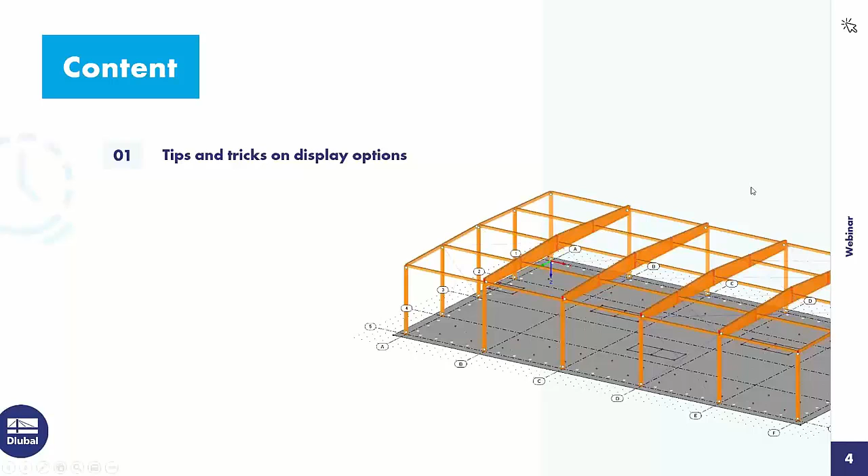To the agenda today, I will introduce some tips and tricks on display options, also on the printout report, also basic information. I do a single and mass print of graphics to the printout report. And I show how to create a verifiable printout report. We turn directly to the program.

RFEM, that's a storage building made of timber and a reinforced concrete floor slab. Bracings from steel, you can see around 20. The model is completed, it's designed, the timber structure is designed, and also the concrete structure. We can go through the load cases, self-weight with roof loads and single loads from racks, snow load, the imposed loads with loads from forklifts and from the racks.

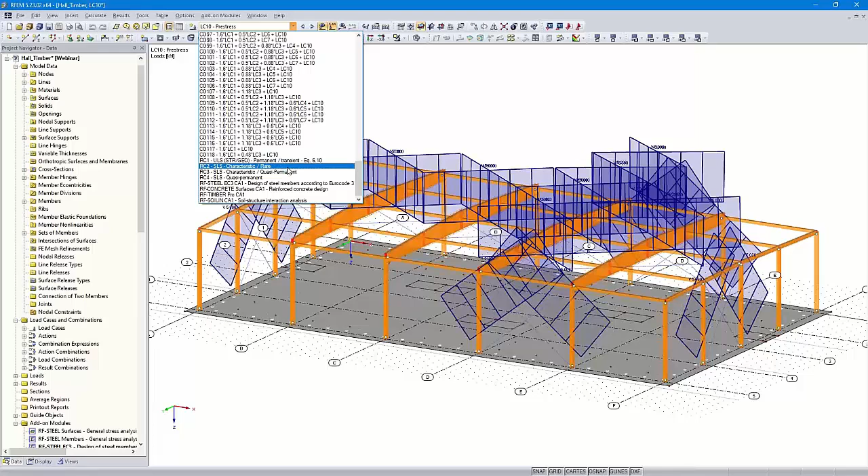Wind in X direction, Y direction. Imperfections in X direction and Y direction. Pre-stress. And then there are a lot of load combinations that are automatically created by the program. Also four result combinations, 1 for the ultimate limit state design, 3 for the serviceability limit state design.

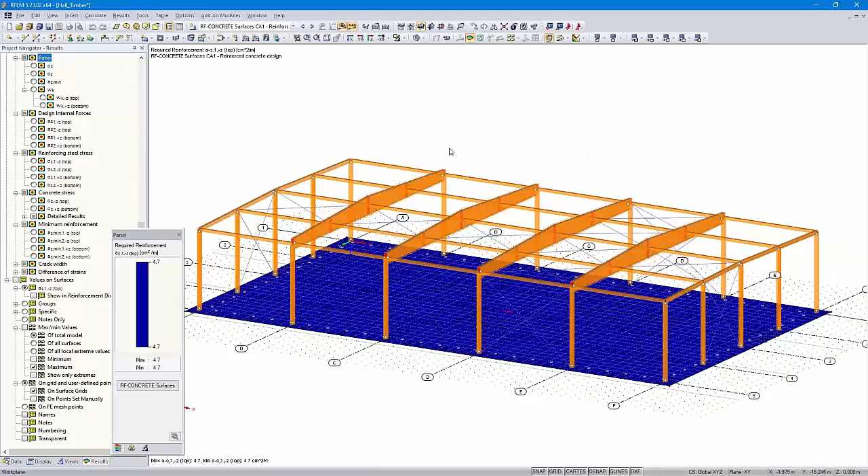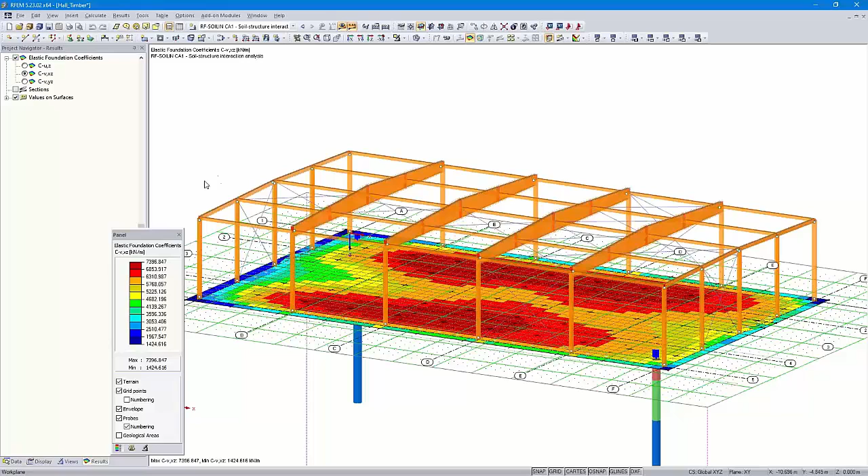Then the design of the steel structure. Those are only the bracings. You can see a design ratio of 55%. Then the concrete results, also for the floor slab. Then the results of the timber design. Here you can see a design ratio of 94%. That's in the horizontal beam here, the maximum design ratio. Then I used RF-SOILIN to determine the elastic foundation coefficients.

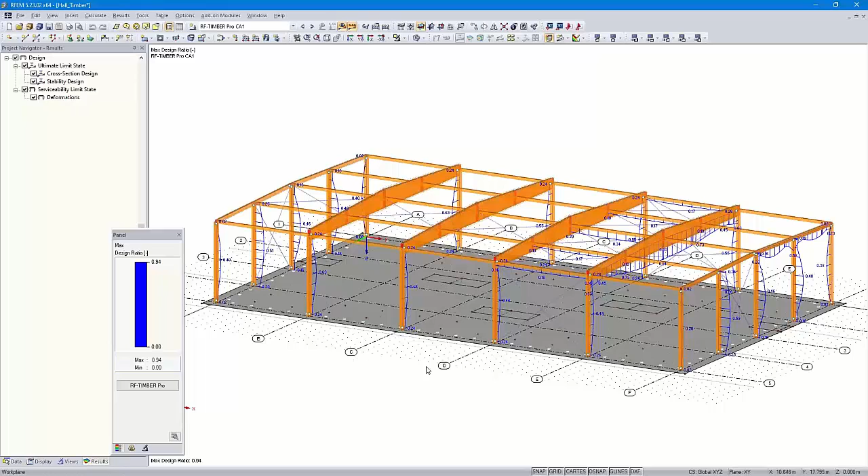But we want to start with the member results. We want to print them in the printout report. But at first, I would like to move the axis designations closer to the model. How to do that, I can show you maybe in the top view. We go here with a right click in the grid options, edit. And then here is checked dynamically according to size of model. We uncheck it and then I subtract here 5.

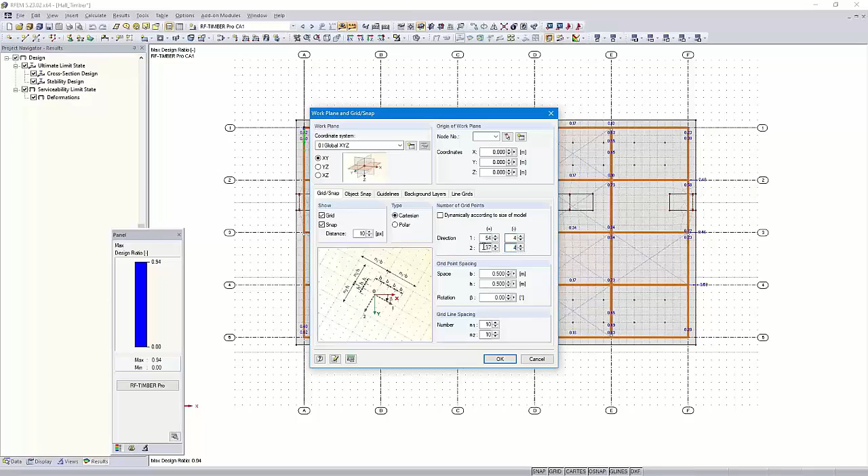Okay, and then you can see the axis designations are closer to the model. You can also hide the axis in the display navigator under guide objects, and then you can uncheck the line grids and the axis would be hidden, but we would like to show them and document them. Okay, then I make only the timber structure and the steel structure visible with that option, visibility by selected objects, and the concrete floor slab is hidden.

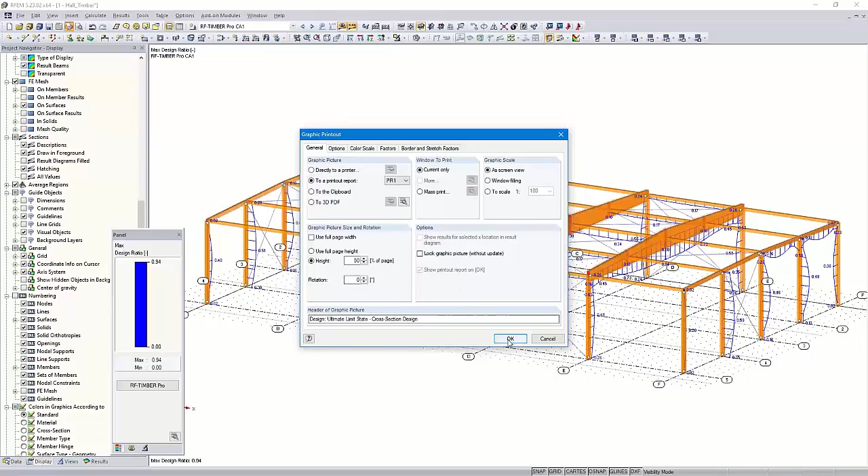Let's print that graphic in the printout report. Here above, print graphic to the printout report, the current only as screen view, that's the options I will use. Then the height, 50% of the page, no rotation, and I confirm that. So usually we would print the graphic with this option here for the printout report, input data and reduced results. But you can also use other options.

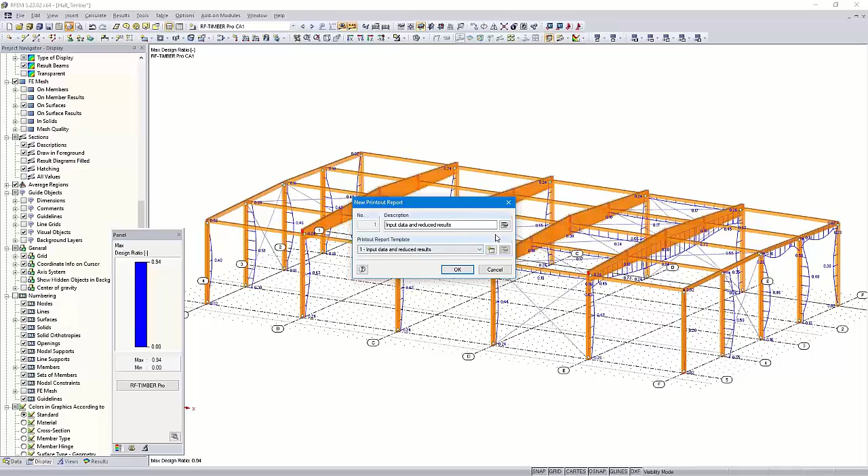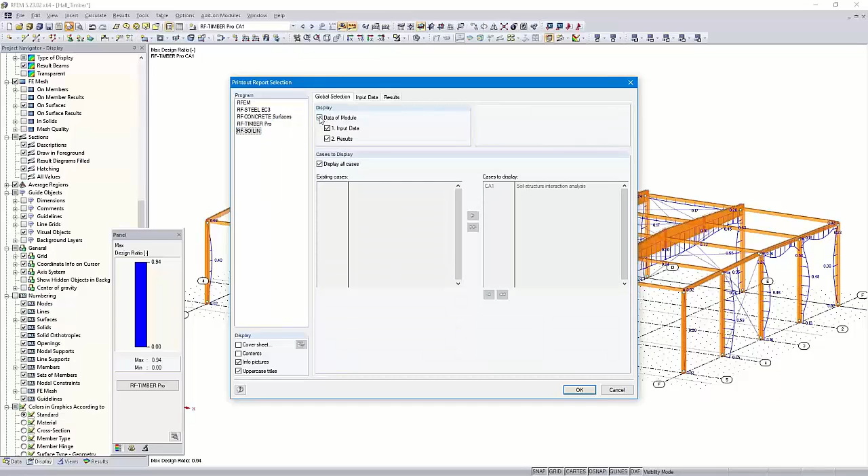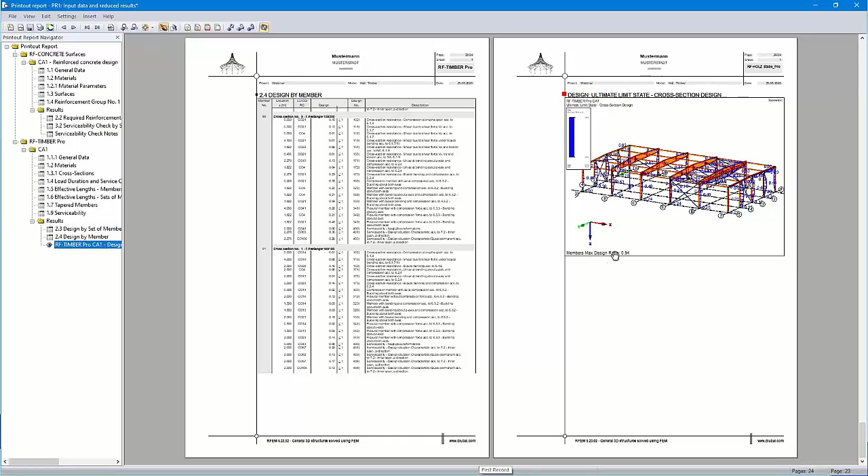But in that case, I would like to disable a lot of pages because we want to print the graphics firstly in an almost empty protocol or in a protocol with not so many pages, and therefore I disable here the RFEM data, the RF-STEEL data. I leave the concrete and timber data because we would like to print graphics in those chapters. So now a printout report with only few pages is created. At the end, we will have more than 170 pages. Now there are only 24, and the handling of the graphics is much better.

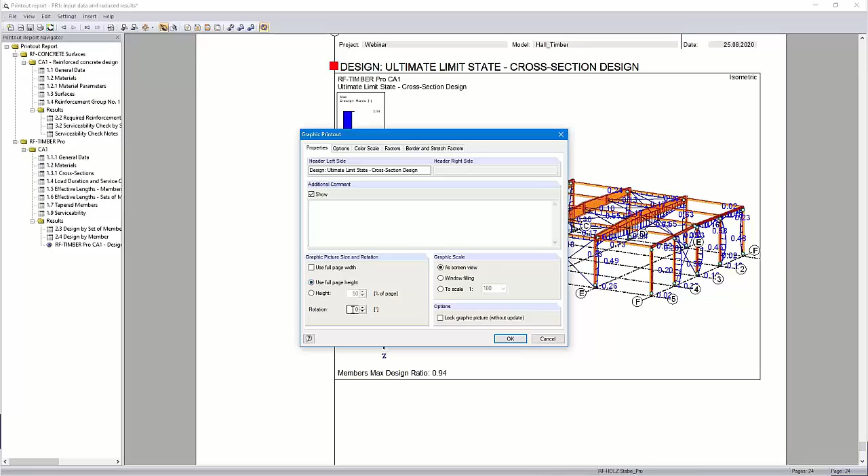Okay, but we can see that graphic is quite confusing, but we can modify that afterwards. By right click, I can open the properties and I can rotate the graphic. At first I use the full page height and rotate the graphic 90 degrees. Okay, quite better, but I'm not satisfied with this graphic. I will change it here with right click and edit.

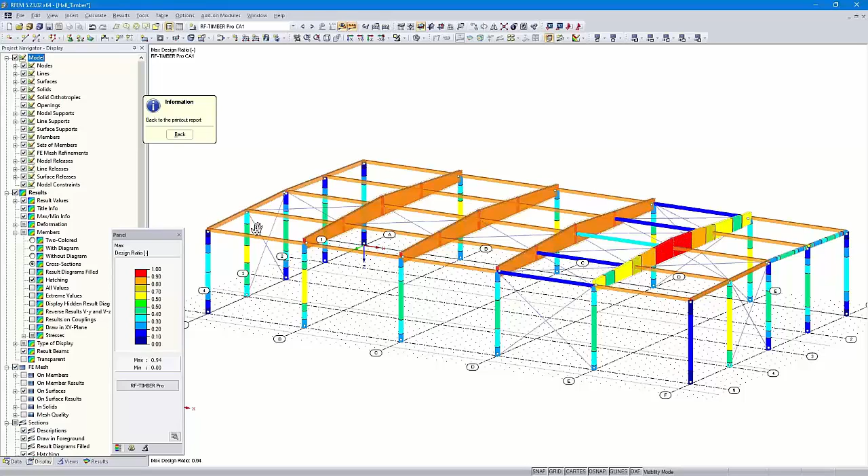I go back to RFEM, and then I can set in the display navigator under results, members, the option two-colored, that's the current state. Then with diagram, it's colored here. Then without diagram, and cross sections. I think that's a good overview. You can see the maximum design ratio is in the horizontal beam here, and I can go back in the printout report.

Okay, that graphic is much better. We will use it, and we would like to print that graphic of the axis E separately in the printout report. We leave the printout report with saving that graphic.

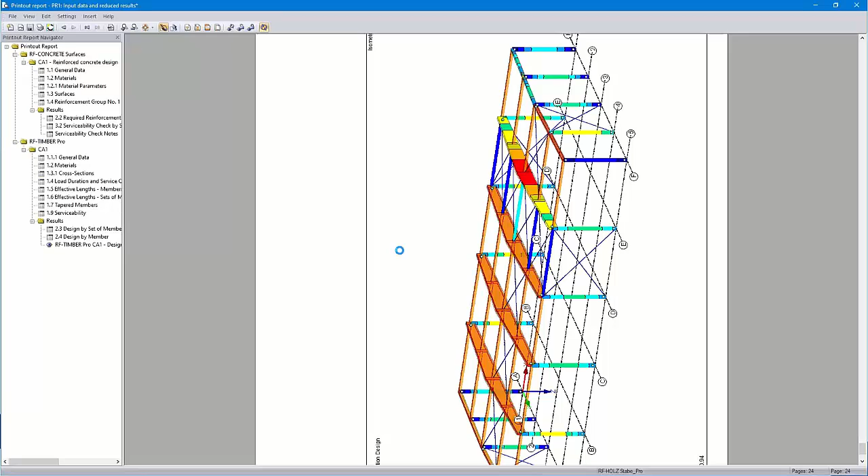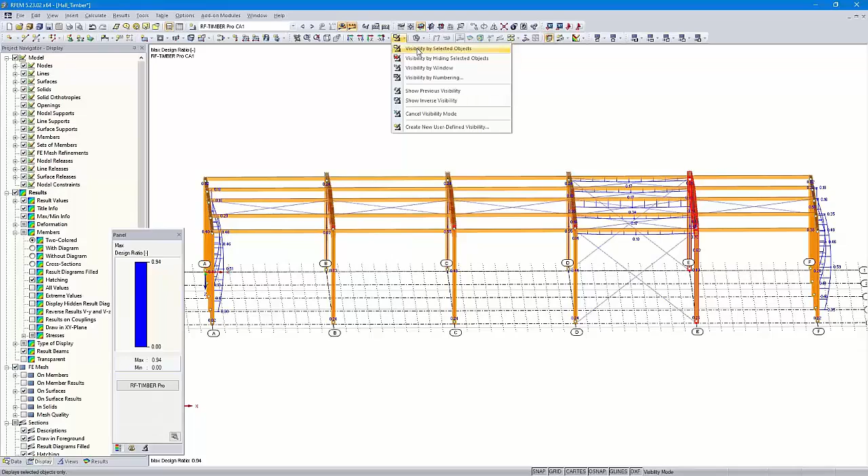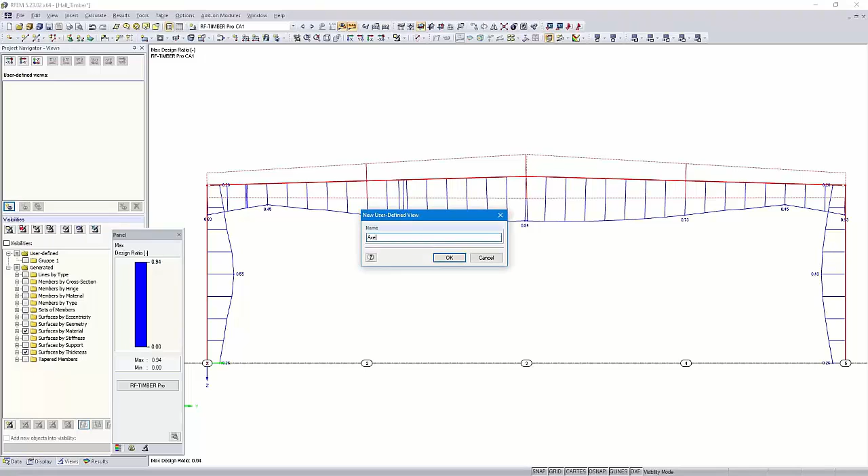Then I create a new visibility. I use this time this option here. It's the same as when I click on the right mouse key, visibility by selected objects. I use the wireframe display model, and we can create a view, for example here, create new user-defined view. I can call it axis E.

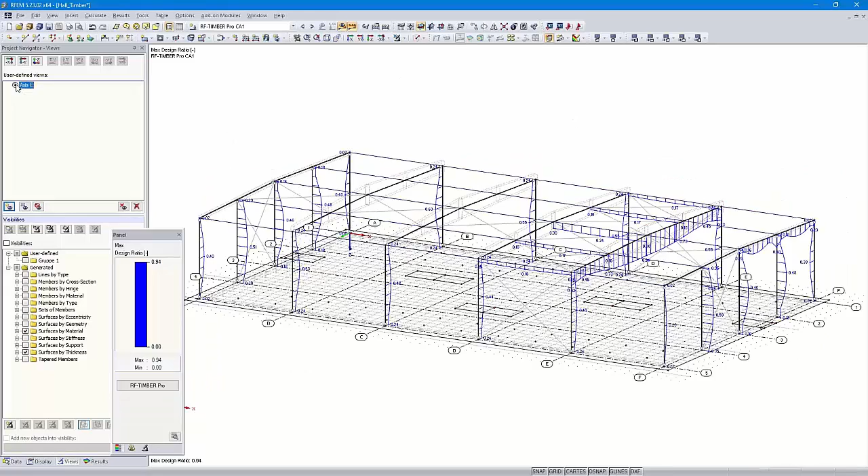Okay, and you can go back easily later to this graphic. I can show you. I cancel the visibility mode, for example this view, and I click here to axis E and come back to this graphic. Okay, here you can see the 94% design ratio. We print that graphic. That's quite easy now.

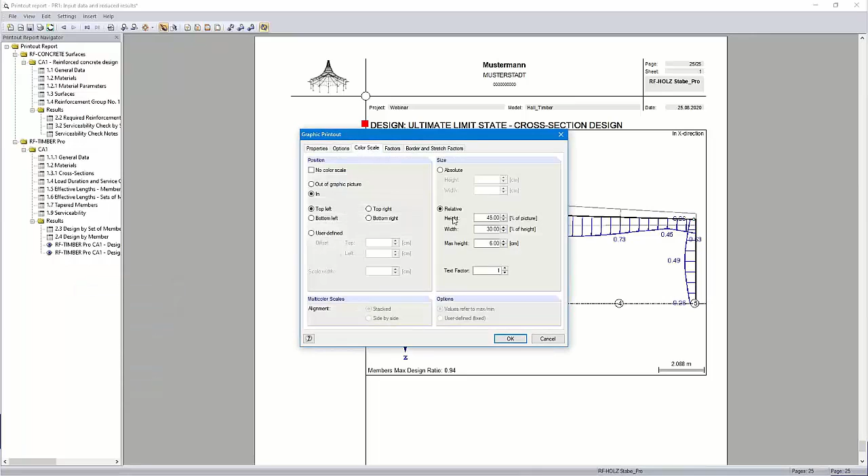So now also that graphic is created. It's quite sufficient. I could make the panel smaller here with properties. I can use a color scale and width of 20%. Okay. Okay, that looks better. I could move that to the right side a little bit, but I don't do that. We leave the protocol with saving the graphics.

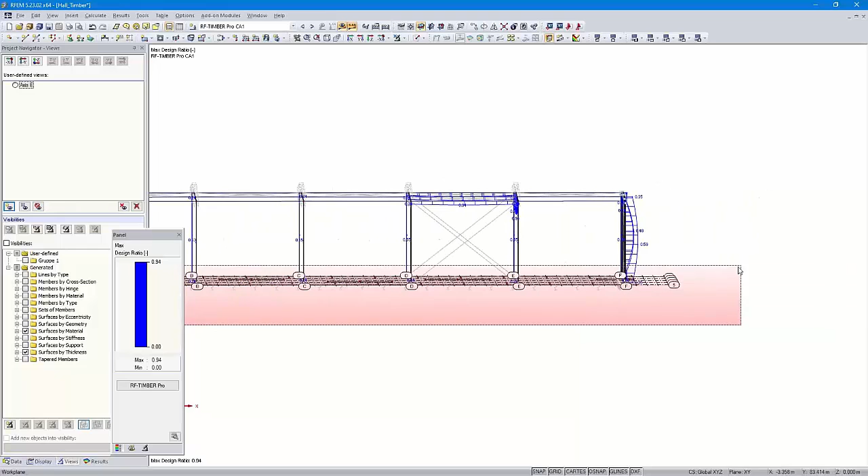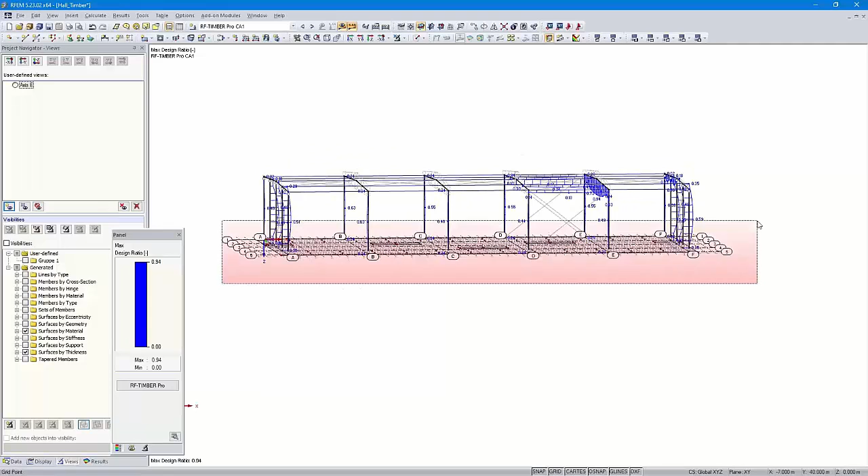And then we print the reinforcement results. Okay. I choose only the concrete floor slab in the view. Just a moment. Okay. So, a view in Z direction.

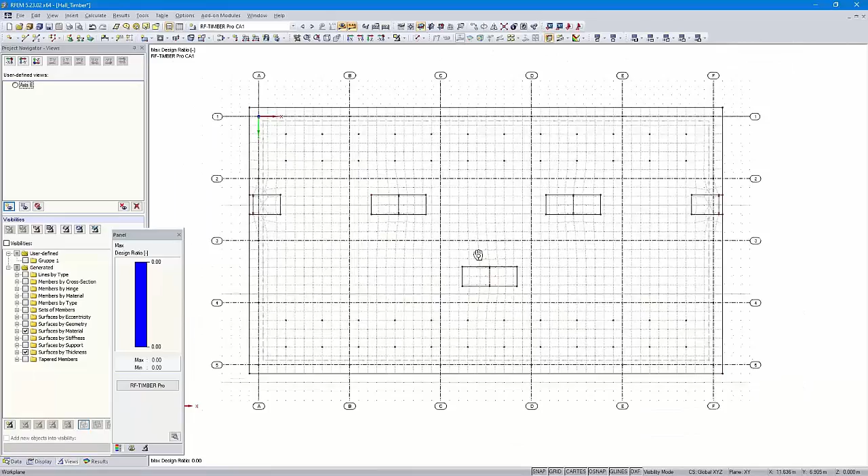A small tip: when you zoom in and out in a graphic with the mouse wheel, you can see steps. If you want to zoom in and out without steps, you can press the Shift key and the middle mouse key, and then move the mouse back and forward, and you can zoom in and zoom out continuously. Okay, just a small tip.

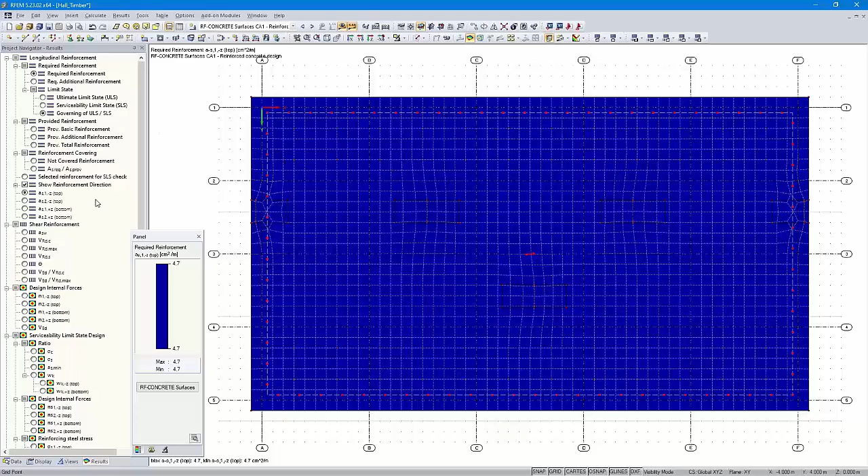Then we go to concrete surfaces and the results. Those are the required results governing of ultimate limit state and serviceability limit state. You can see there are almost the same values in the concrete floor slab because of the restrained design.

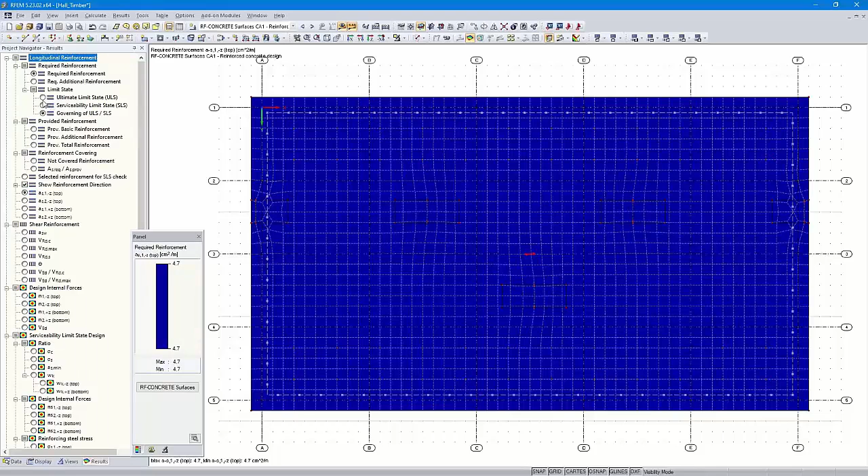But I would like to do a task that is more difficult. I would like to print a graphic with all values in all grid points. I check here values on surfaces, on grid and user-defined points. And when I have got here all values, I can use here not the ISO bands, but the ISO lines.

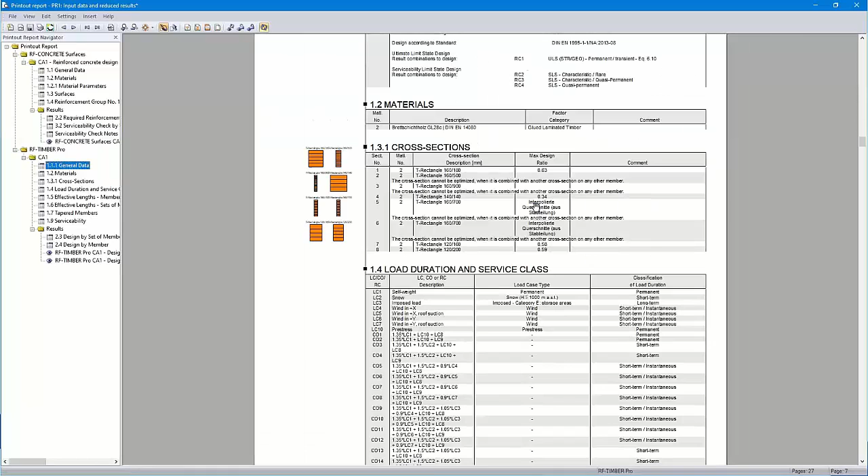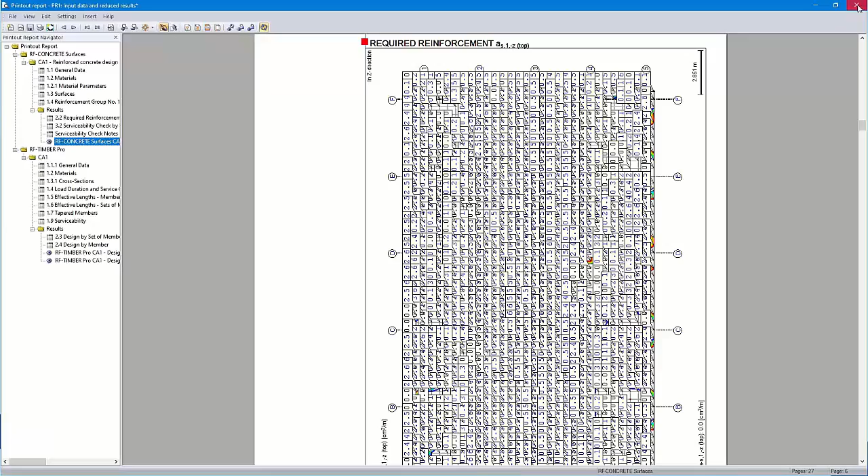And then I test the print. I print the graphic. I use the full page height and rotate it 90 degrees, and we will see how it looks. Now we can see the values are too large. The graphic is quite confusing, and we leave the protocol without saving.

By right-click at one value, we can open the display properties, and we are at the right place here, result values on surfaces. We can change the settings here separately for the screen and the printout report, but we can also use identical settings for both. We change only the setting for the printout report.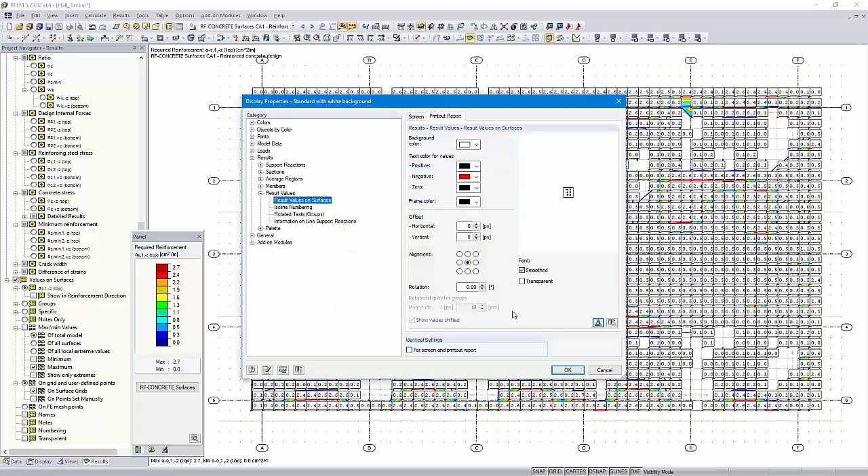I use here for the values the black color. Then I delete the arrow here. Then I move the values to the middle of the grid point, and I change the font size to 4. That's in German because my Windows is in German, but it doesn't matter. So, okay.

And then we print it again. Same settings. Just a moment, and then we will see that it looks much better now.

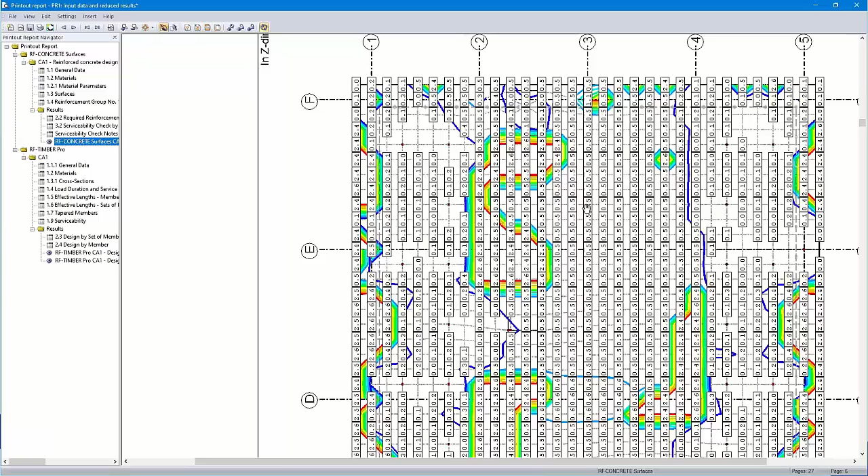Yeah, now we can read all the values here. At least for a PDF print, it would be absolutely okay. Then we leave the printout report because I would like to show you a mass print only for 4 pages for the 2 directions here, and for the top and the bottom, meaning the reinforcement.

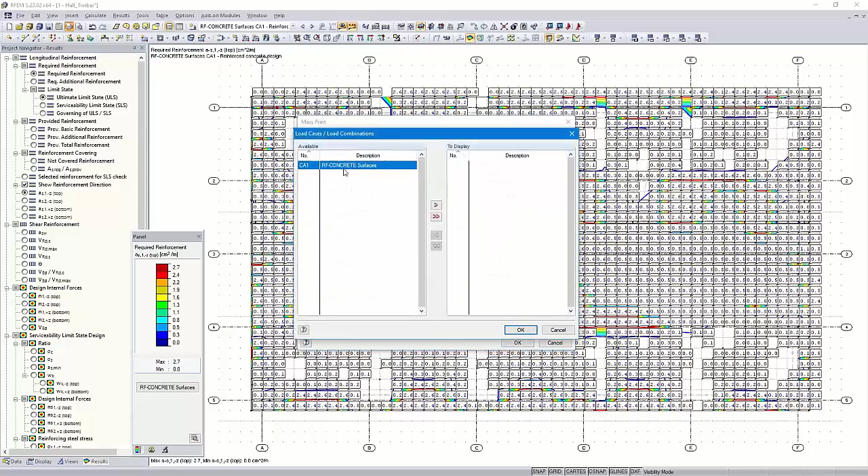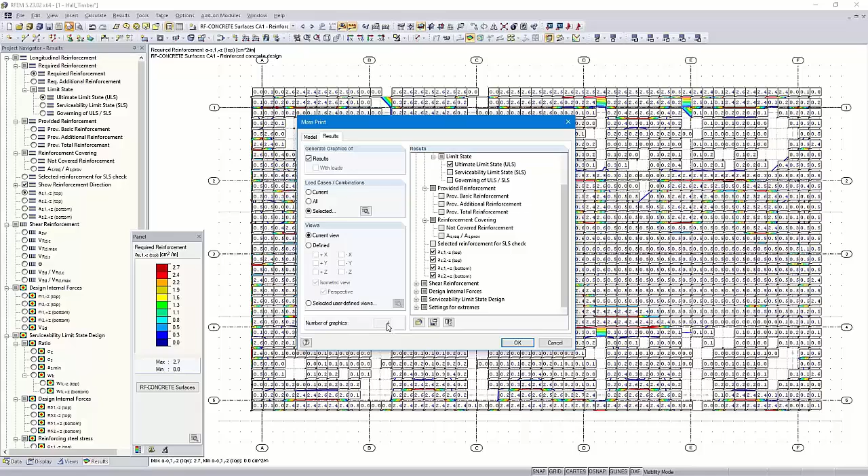I go here to print again and choose mass print. I change the mass print settings and I select the concrete surfaces, module data, choose ultimate limit state design and AS1, AS2 for the top and both for the bottom. I could also add other graphics, but for this example, 4 pages or 4 graphics are sufficient. You can do that the same way if you want to print more graphics.

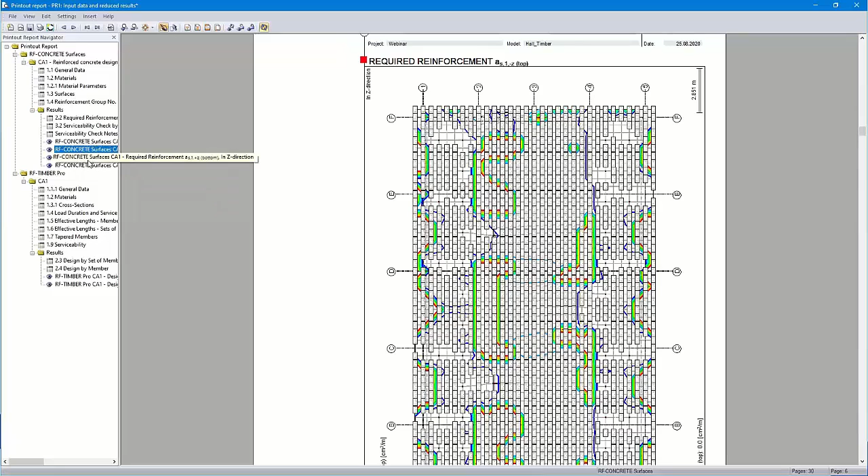The mass print works for member graphics or graphics with member results as well, but I would like to show you the function for the surface results. Okay, just a moment, and then all graphics are visible. I click our graphics here. You can see it's okay.

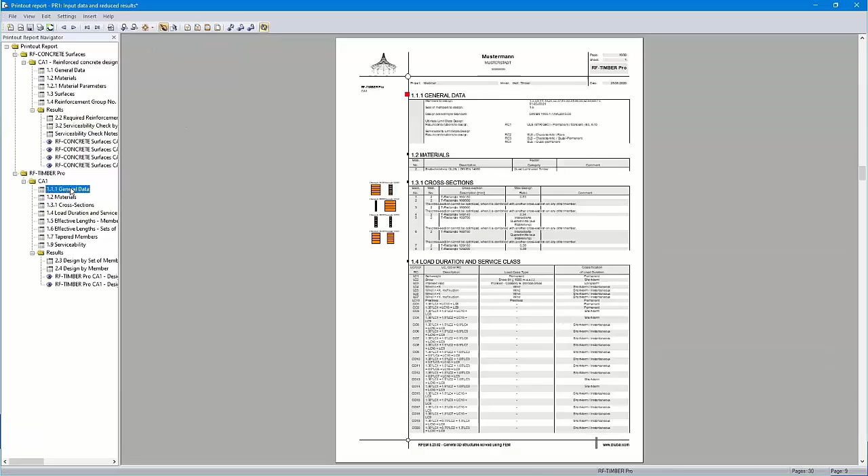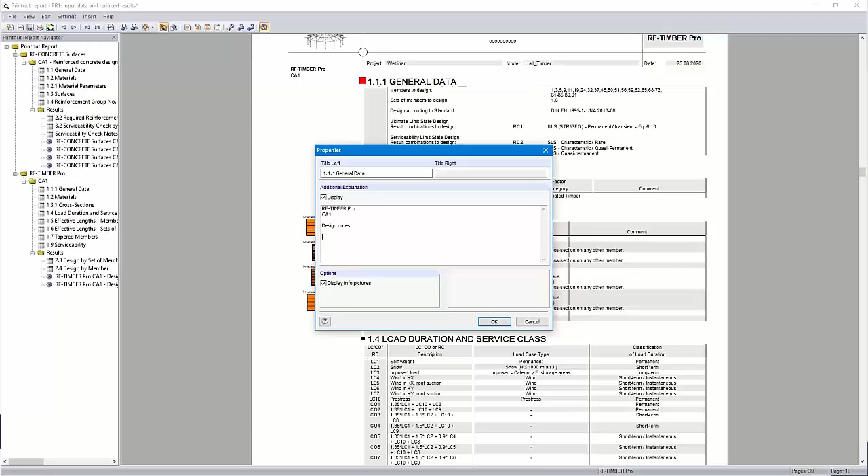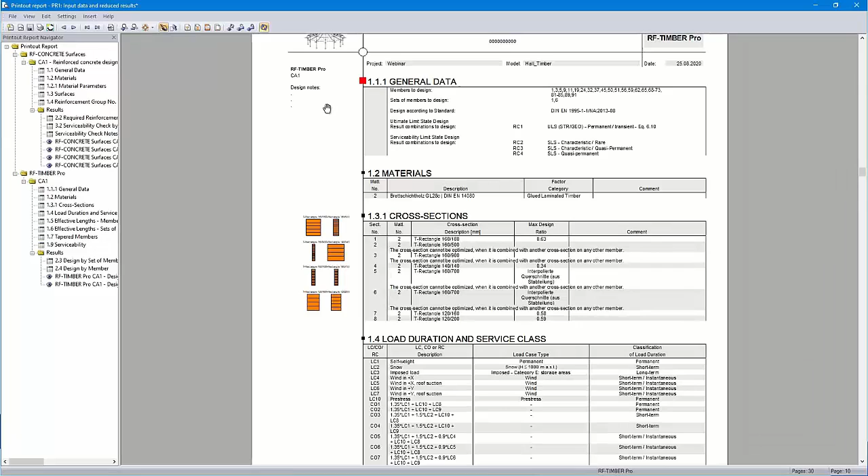Okay, a small tip. For example, if you want to add comments, etc. Here in the left column, you can right-click, then properties, and you can add text here. For example, design notes. Just an example. Here you can see it. Just a small tip.

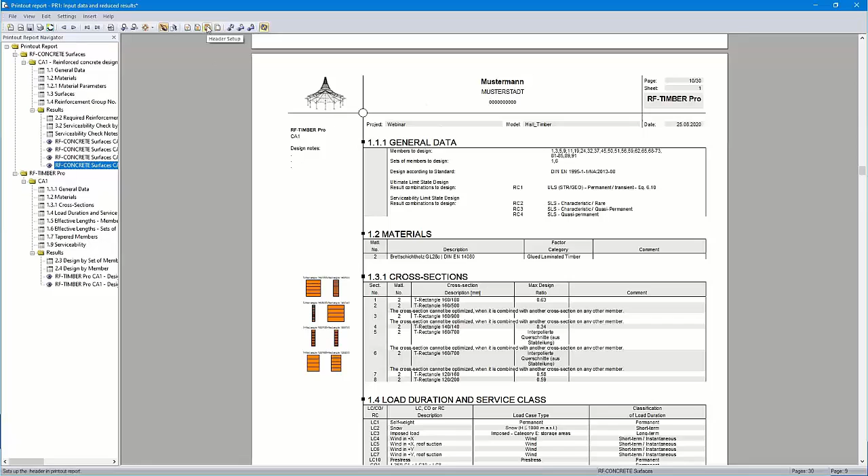Okay, then some basics. For example, we can create a header by clicking here, header setup. We can open the library and we can create a new header. I already created a Dlubal header with the name of our company, the address and the logo. You can change the first number of the protocol, for example. In the settings, you can add prefixes, etc. So the header should be okay now.

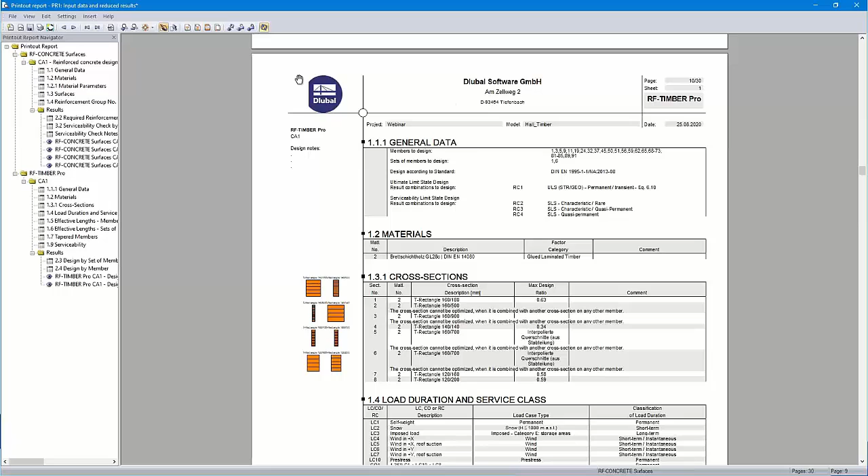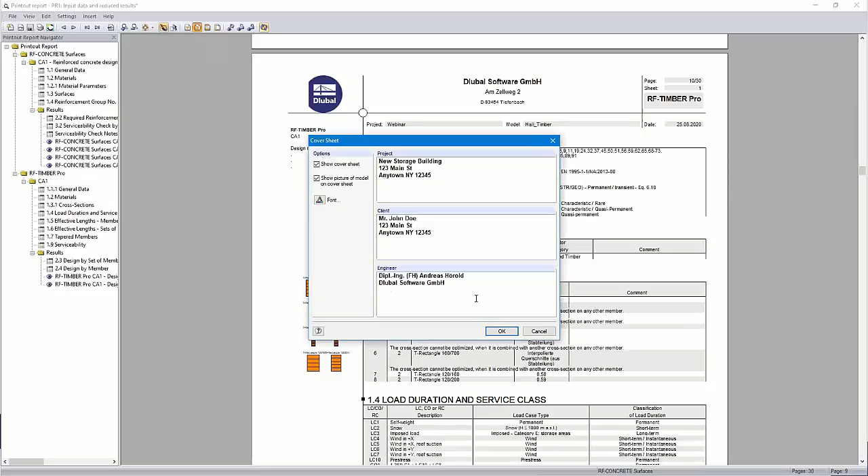Yes, okay. Then we create a cover sheet, here with cover setup. You can also show the picture of the model automatically. I can add some text here. I prepared the text. It's only fictive text, but we would like to do the printout report complete. Okay. That's the cover. You can see that doesn't take much time. We can go to the next point.

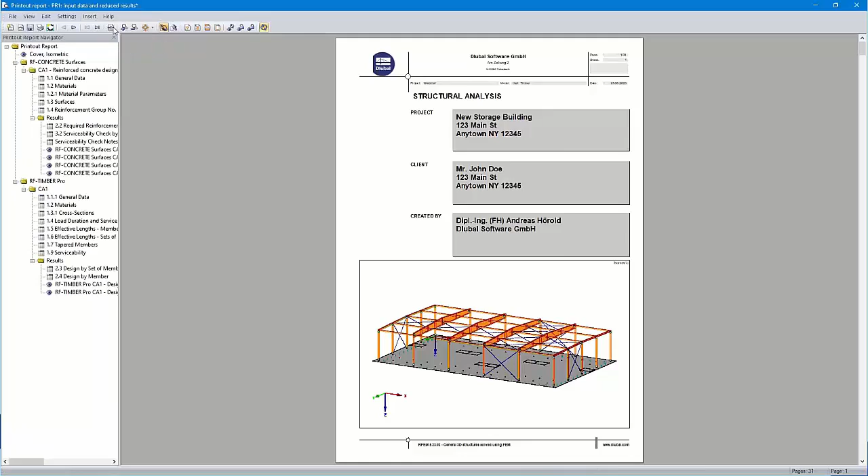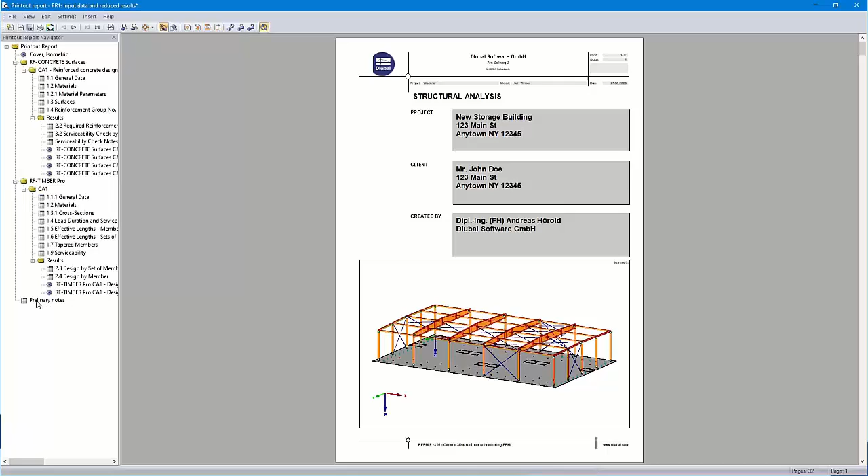You can insert text blocks, text files, images. Now I will add a text block. Here, the preliminary notes. I have also prepared some dummy text. Only the first sentence is correct, the rest is dummy text. It will be added at the end of the protocol, but we can move it later to the right place.

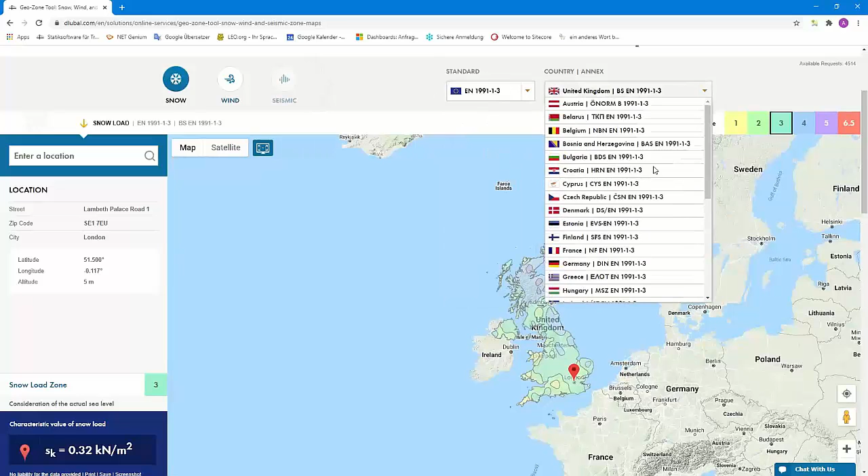I will add an image from the clipboard. I go to our website, and here under solutions, you can find the online services, for example, the Geo-Zone Tool, cross-section properties, the glossary. I think some of you know that tool already. It's free. We have a lot of standards here, international standards, also the Eurocode with the national annexes. I use Germany. I entered the address of our office in Leipzig.

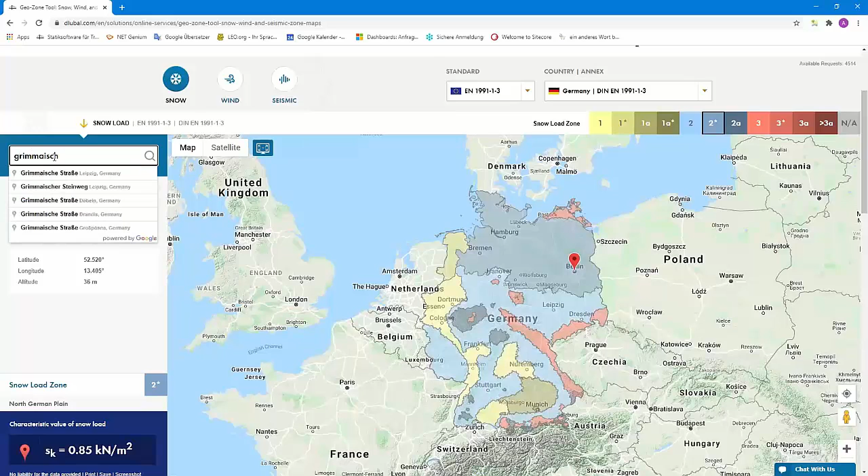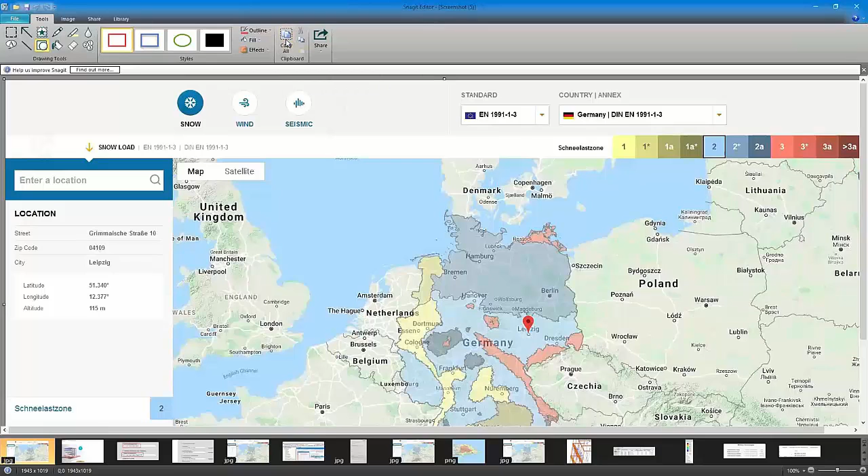Okay. And we can see here snow load zone 2 and the characteristic value of the snow load. And we can create a screenshot. Then we can open it with an image tool. For me, that is Snagit. I can copy it to the clipboard and then insert it into the protocol. I call it snow load zone. And you could do the same with the wind loads, earthquake load zones, and so on. Also other graphics.

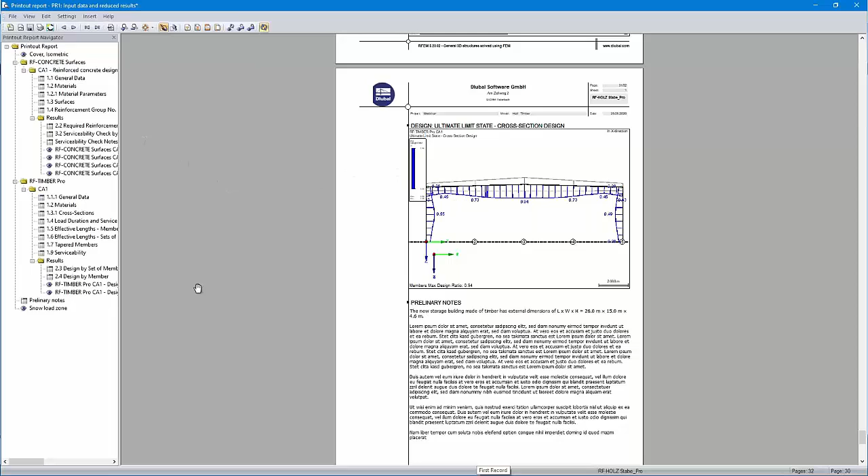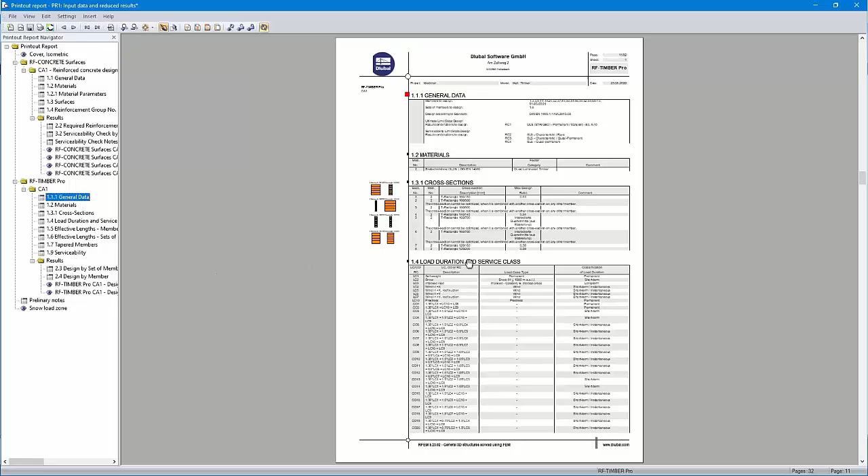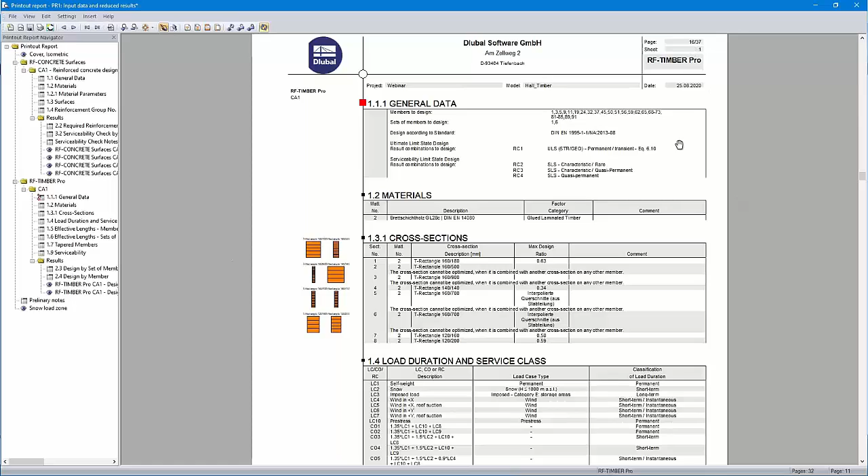Okay, in the next step, or another tip now again. You can add empty pages here. For example, you would like to add pages from external programs in your protocol. And then you see here, that is page number 11. By right-clicking I can insert pages before the block. I call it test and 5 pages. Okay. And then you can see it's page 16 and this page is page 10.

Oh. But I will delete them. Okay. Just for info. Now it's page 11 again.

And the next step is to select the topics. First I check contents here. We would like to show the content. Then the RFEM data. I then choose the steel data. Those are already in the protocol. Okay. Now you can use the settings which you like. Yeah, you can disable some content.

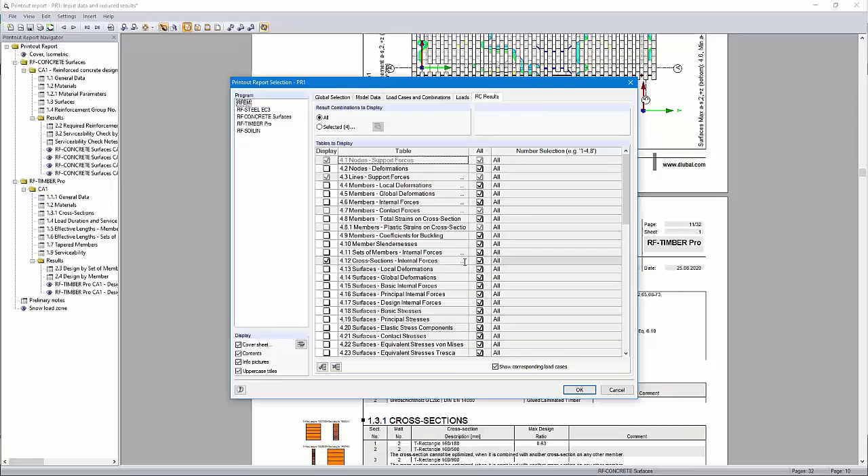For example, I will disable the results of the load cases and load combinations, and use other settings for the cross-section internal forces. I choose not the partition values, but the extreme values of the cross-sections. Okay. Therefore, the protocol will not have too many pages. Okay, then the whole protocol is created in a few seconds.

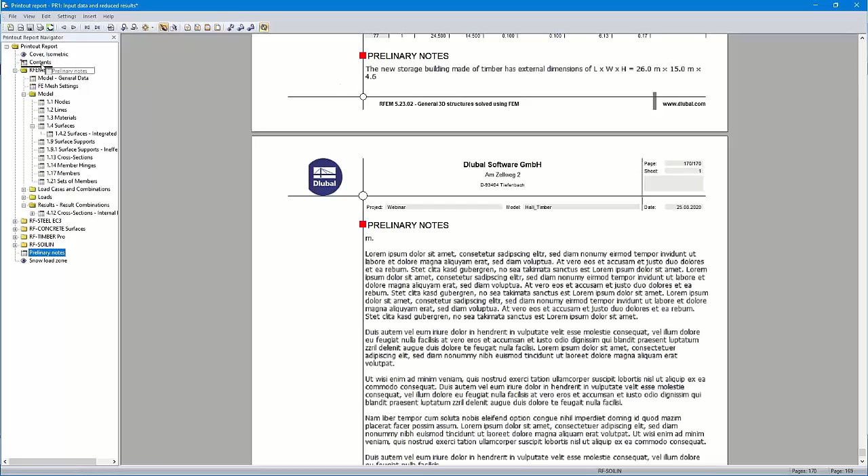So you can see all the module data. I moved the preliminary notes to the beginning. Just a moment. You can see now we have 170 pages. So I move it behind the contents. Okay. Now our pages will be renumbered. It takes some time. So, and I moved this snow load graphic here into that chapter. I have to wait some seconds. Okay.

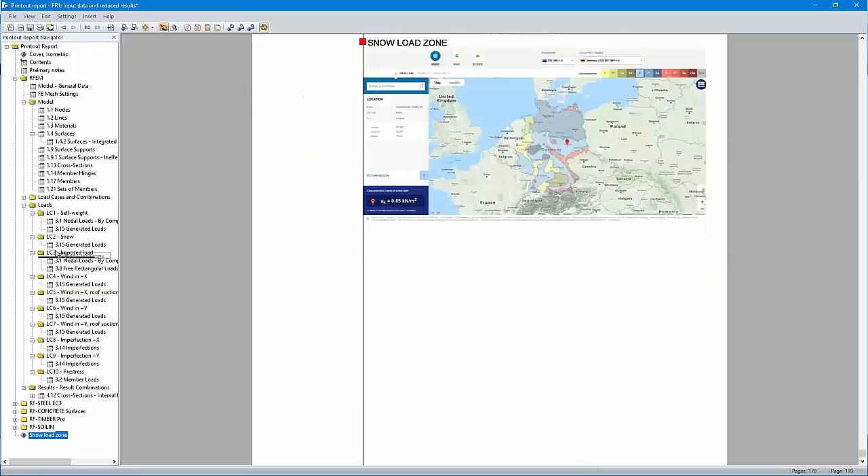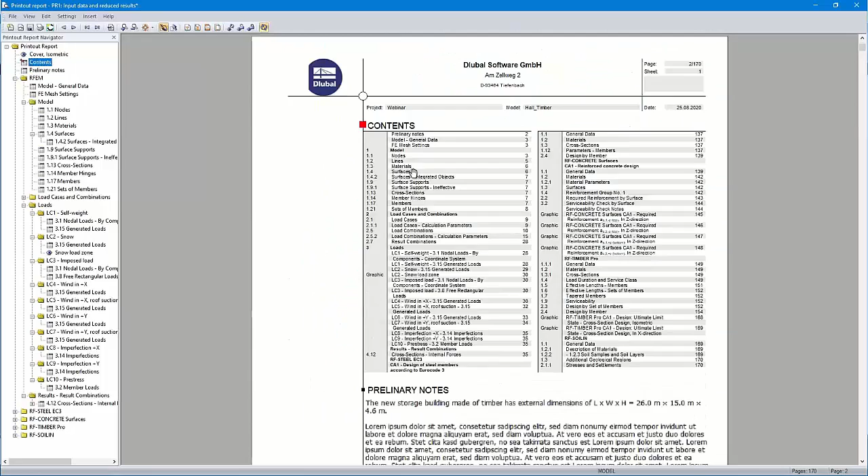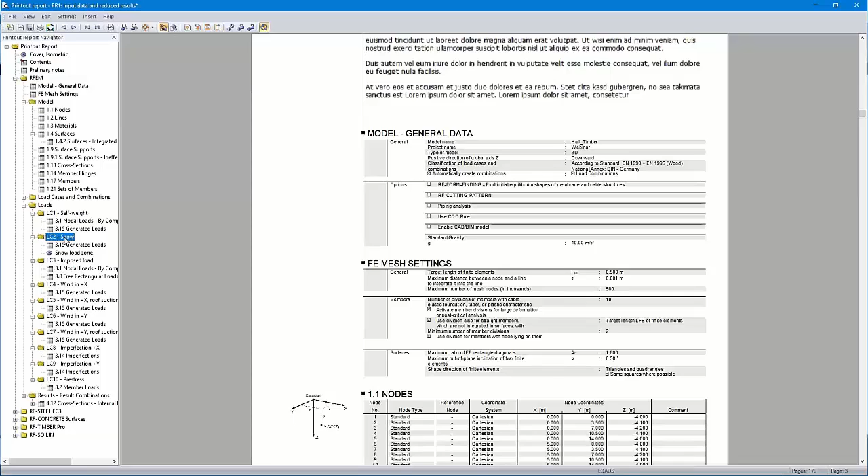So we jump to the preliminary notes. The cover sheet, the contents, preliminary notes, and then the RFEM data are shown. Here, snow, the generated snow loads, and the graphic from the Dlubal homepage.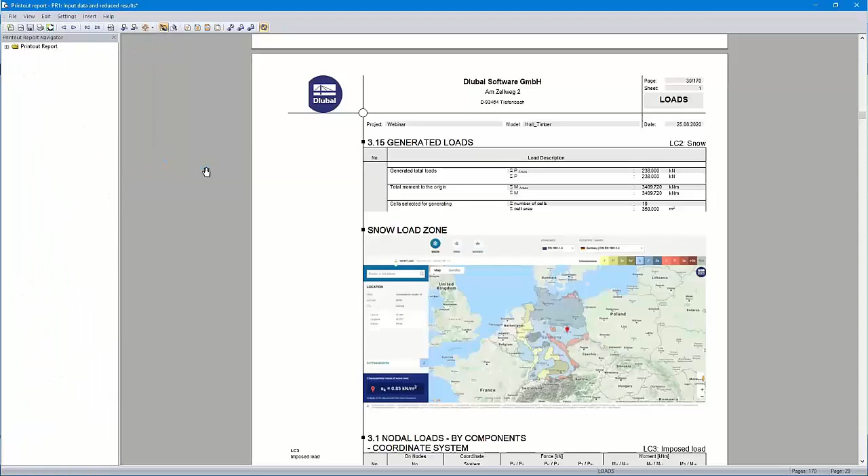Then it's possible to translate the protocol. There are 13 languages available: German, French, Italian, Russian, also Chinese, etc. By clicking here to French, the whole protocol will be translated in few seconds. You can see here the text is already in French.

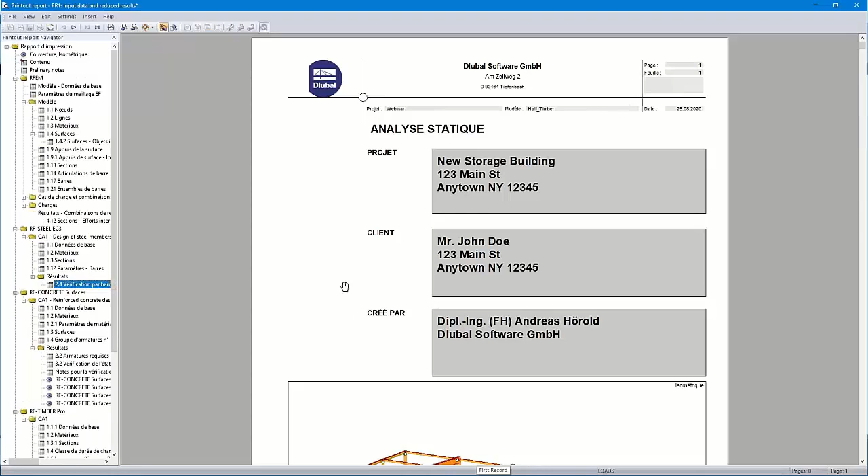Okay, we have to wait some seconds. I will show you some other parts. Here, the whole protocol is now in French. We translate it back. Okay, that will take some time.

You can export the printout report to VC Master, for example. How to do that, I would like to show you with the help of a knowledge base article. Sandy Matula wrote this article, and she did also a short video where you can see how it works.

You can also print the printout report as a PDF on my printer. I can show you file, for example, export to PDF, export to RTF. That's a text file. You can print it directly to a printer, also to a PDF printer.

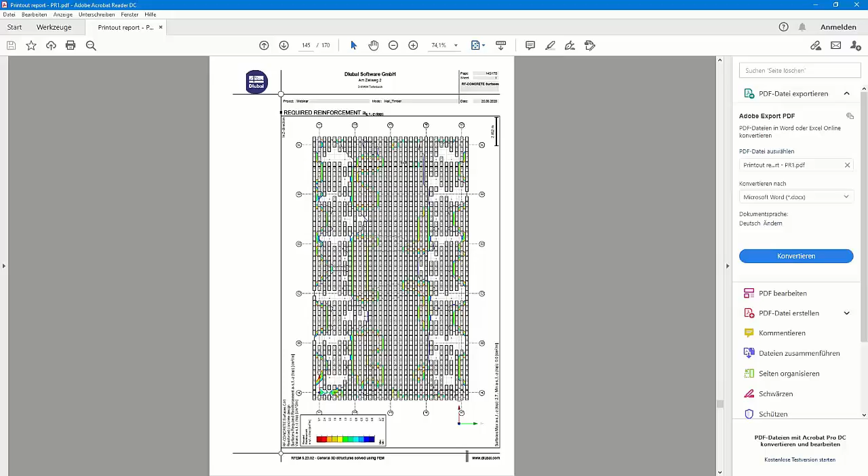I can start it, but it would take some time, so I cancel it and show you the complete report instead. That's the PDF. You can see the graphic here. It looks quite good. That's the whole printout report as a PDF file.

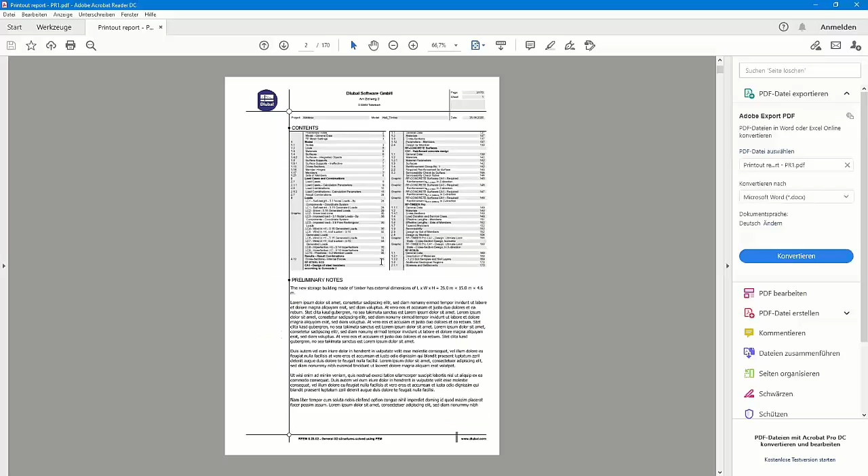Okay, another tip, you can save printout report templates. For example, you can use those settings here for a new template. Then you need to choose here new from current printout report, and then you can enter a name and save it. You can also save a new template. You can check and uncheck the chapters that you want to display.

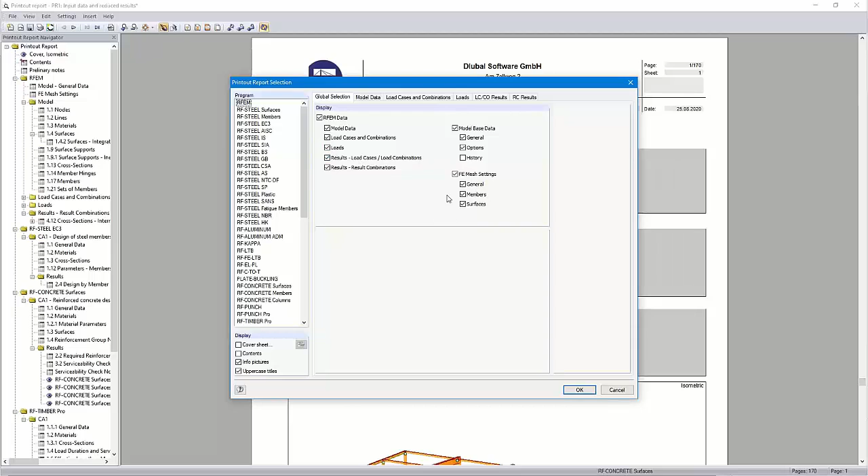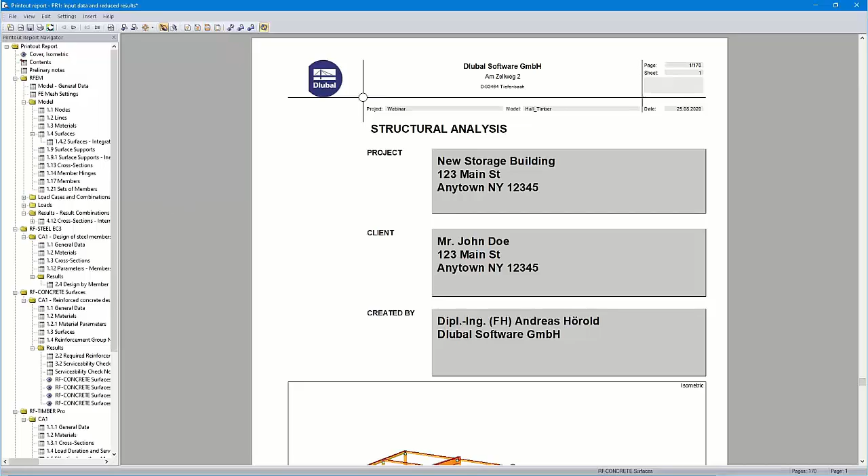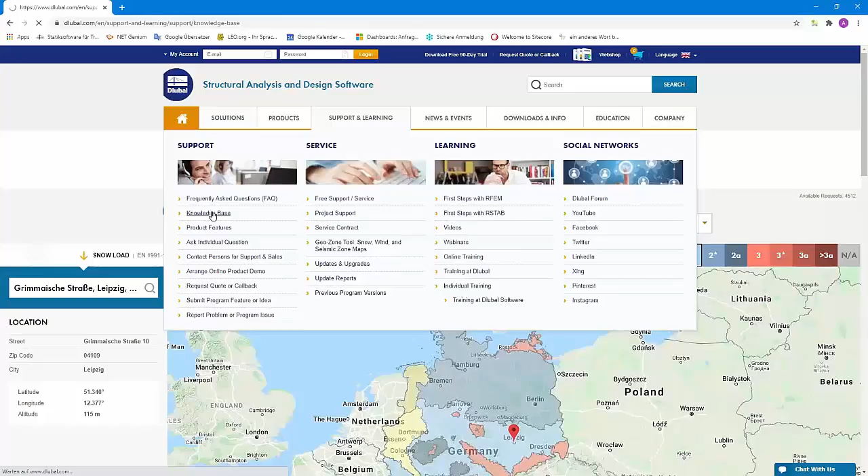As promised, I show you the article about VC Master. Here under Support and Learning, you can find a lot of FAQs and knowledge base articles. I open the knowledge base database.

You can see a lot of articles. I use the full text search. VC Master, I searched already in the text for it. Okay, here are 3 articles. I will show you the article export to VC Master. Here's a short description. Here you can see that Sandy wrote it.

Maybe we can take a look at the video. An easy beam, a free field beam with a cantilever, printed in the printout report as we did it in the webinar today. This simple example has only 4 pages. Now with that graphic, VC Master must be opened before you export anything from the printout report to VC Master.

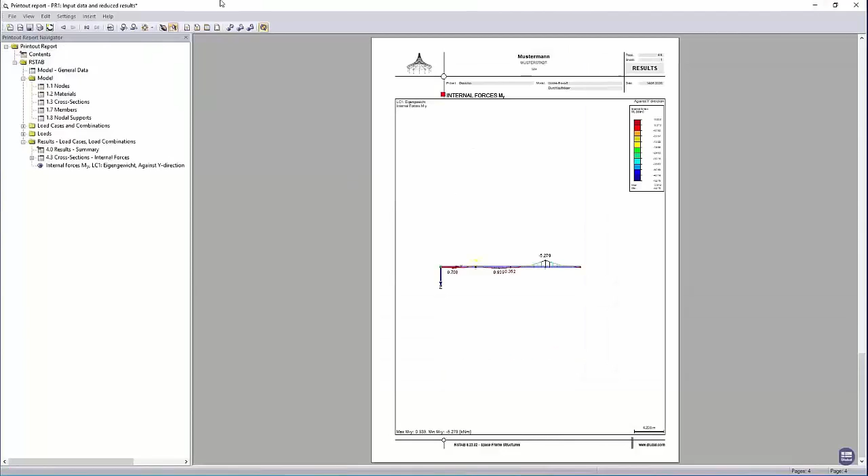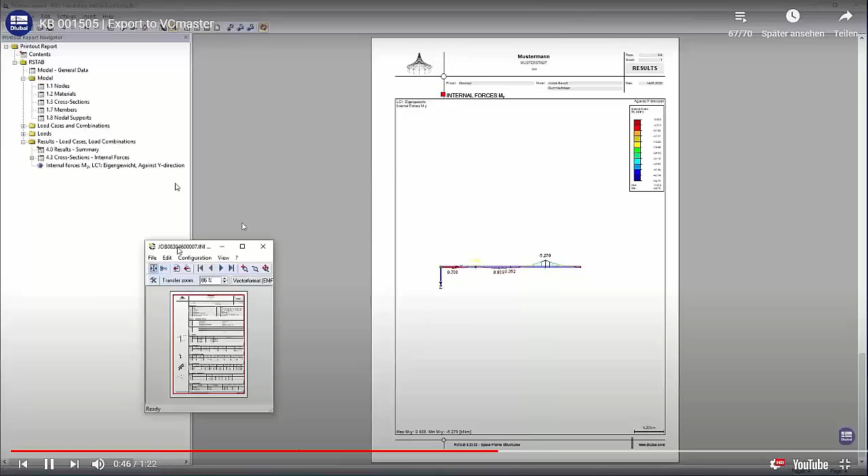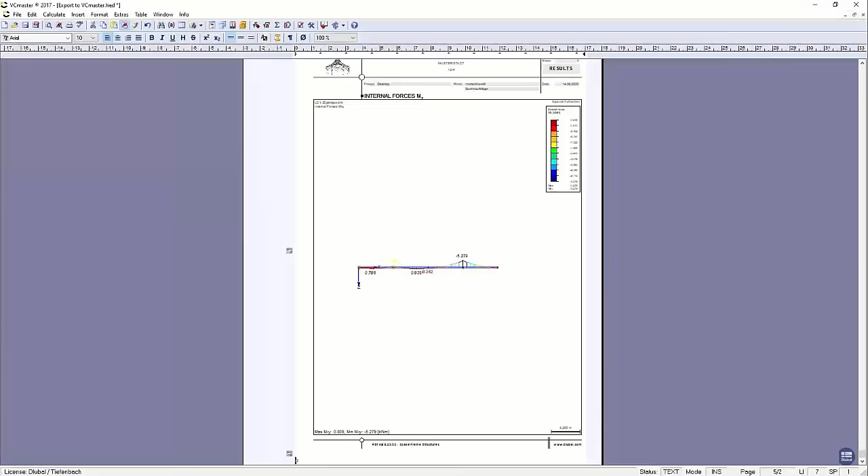Then you can click at the top to VCmaster, and then you can choose the pages that you want to export. This report has only 4 pages, and all pages are transferred in some seconds. You can also add to this VCmaster tool other printout reports, also from other programs.

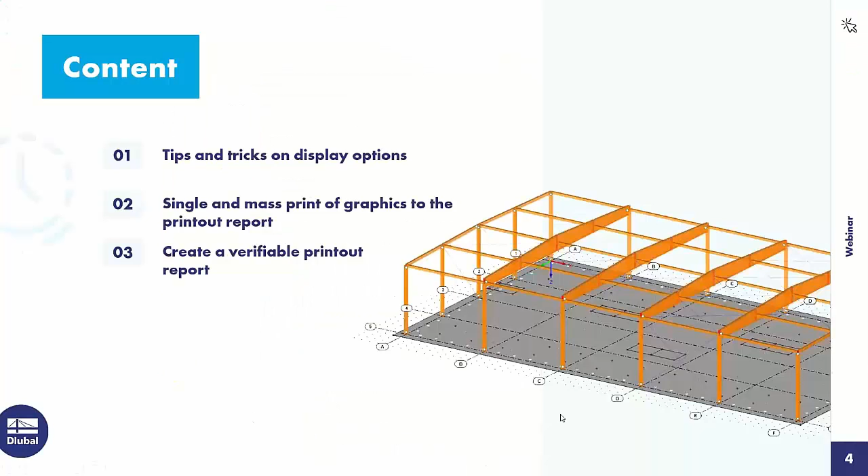Yeah, it's quite easy to handle. Just test it. Okay, then I go back to the PowerPoint presentation.

I would like to introduce you some free online services. I already showed the Geo-Zone tool with a lot of codes where you can determine the snow, wind, and seismic load zones, etc. Then the cross-section properties, it's also a free online tool for standardized sections, and you can also define your own parameterized cross-sections and calculate then the properties.

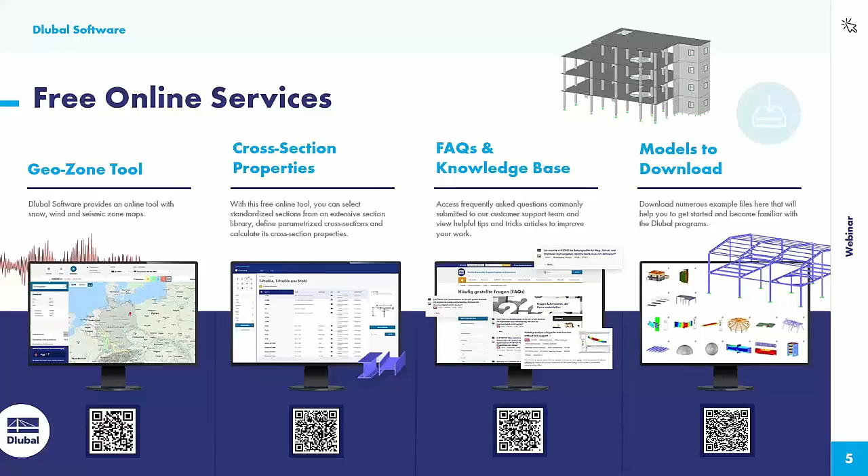I showed already also the FAQs and the knowledge base, a lot of valuable, informative stuff. Then you can download models from our website. The Dlubal engineers created them. You can find there also the model of today's webinar, also of our other webinars.